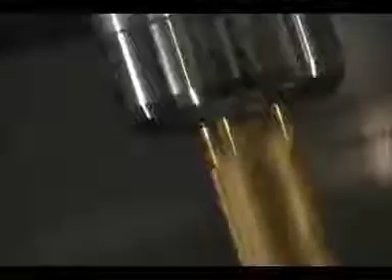NT Tool is pleased to introduce our newly developed milling chuck, the Super Tite-Lock CT-S series, available in BT, CAT, and HSK tapers.

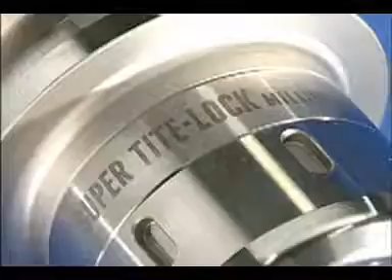The CT-S Super Tite-Lock milling chuck retains the physical dimensions of our popular CTA chuck, designed for light to medium cutting, but has the added advantage of being able to take the heavier cuts usually associated with our CTV chucks. The CTS is truly a general-purpose holder capable of going from finishing to heavy roughing cuts with one body, all while maintaining an economical size.

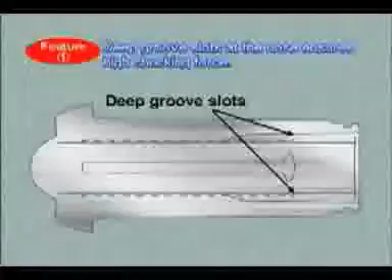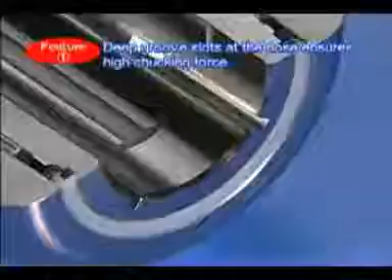Let me highlight a few of the technical features which will illustrate why NT's Super Tite-Lock CT-S milling chuck should be your first choice. First, NT has incorporated 4 deep groove slots spaced equally around the ID of the bore at the mouth of the tool, dramatically improving gripping forces in this critical area.

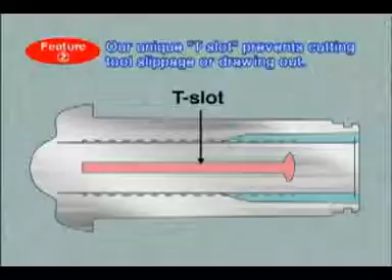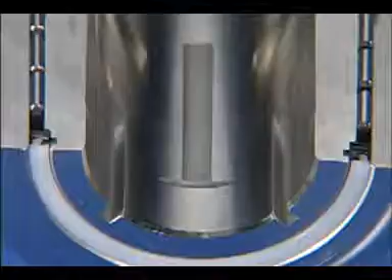Secondly, NT's patented T-slot grooves in this same area of the bore not only increase gripping forces, but also reduce micro vibrations, allowing heavier cuts to be taken. This combination of deep groove and T-slots ensures a tool which will be held securely with increased protection against tool slippage.

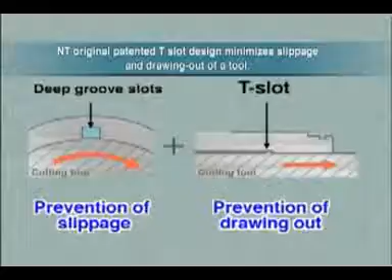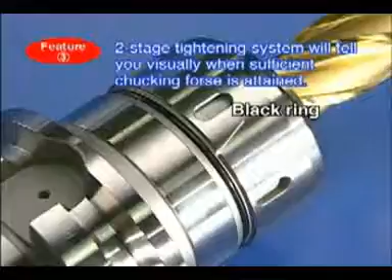Another unique feature of NT's Super Tite Lock CTS milling chucks is the 2-stage tightening system. Comprised of a black ring indicator and a tightening stop system, adjustment for cutting conditions ranging from finishing to roughing becomes easy and error-free.

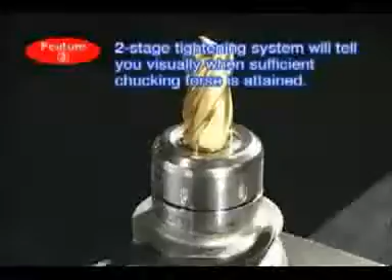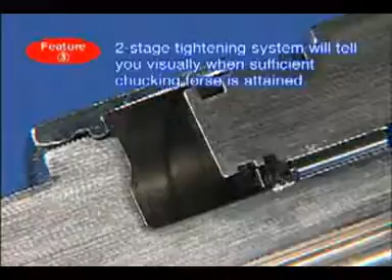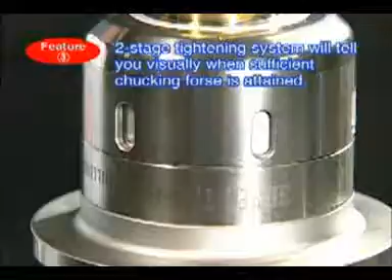When tightening, you are ready for high accuracy finishing and general machining when the black ring disappears from sight. Continue tightening until the tightening stop system engages, and you are now ready to perform those heavier cuts you need to make.

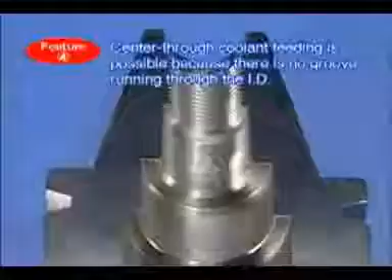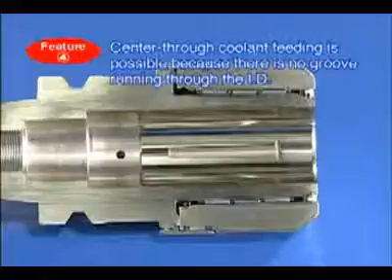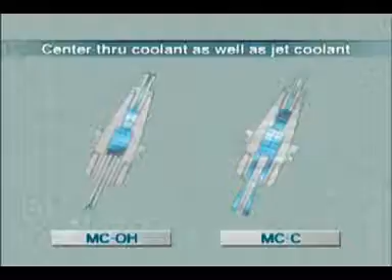Due to the unique design of the Super Tite Lock holder, through coolant is delivered directly and efficiently without the need for additional seals, as long as the tool shank is inserted past the deep groove slot. If using a cutting tool with a shank diameter smaller than the bore of the Super Tite Lock holder, NT's specially designed MC-OH coolant collets may be used. This will allow you to take advantage of the through-the-tool coolant capabilities, still with no additional seals.

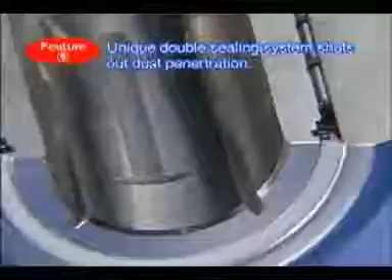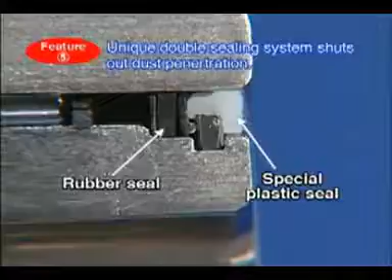The new double seal design of the Super Tite Lock holder allows you to run aggressive cutting data and also contributes to extended holder life. NT's double seal system, with a resin seal at the mouth of the tool and a rubber seal behind the locking nut, combines to create a sealed system. The internal components of the holder are protected from dust and other contaminants, reducing maintenance costs and extending holder life.

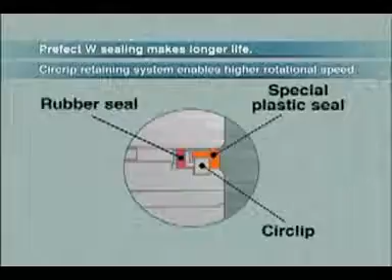Another advantage of the resin seal at the mouth of the Super Tite Lock milling chuck is security, allowing for machining at high RPMs without fear of seal releasing. In review, the new Super Tite Lock milling chuck from NT, incorporating new and unique design features, provides superior gripping forces and the ability to cover the full machining spectrum, from finishing to roughing, in one economically sized tool.

Now, let us look at some actual machining examples. Our first demonstration will be profiling in carbon steel JIS code S50C, AISI code 1049 with a 32 mm coated high-speed steel end mill with 4 flutes. Cutting conditions for this demo are 380 RPM with a feed rate of 152 mm per minute. The axial depth of cut is 60 mm, and the radial depth of cut is 3.5 millimeters.

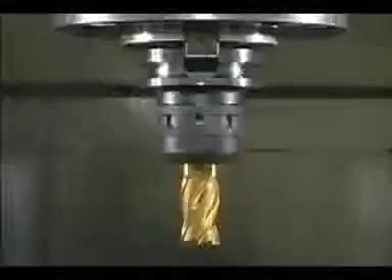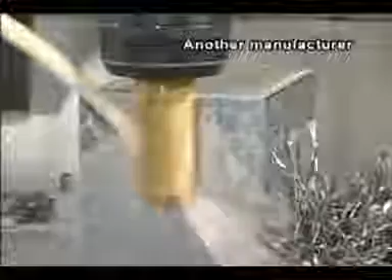First, we will perform the demonstration with a milling chuck from another manufacturer. The holder is a BT50 with a 32 millimeter bore and a gauge length of 105 millimeters. Upon inspection, it is evident that there was chatter during the cutting operation, resulting in an unacceptable surface condition. As a result of this chatter, in addition to poor surface finish, machining accuracy will suffer, and the cutting tool edge will fail prematurely.

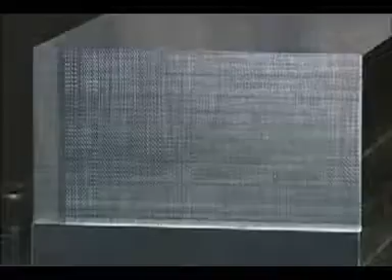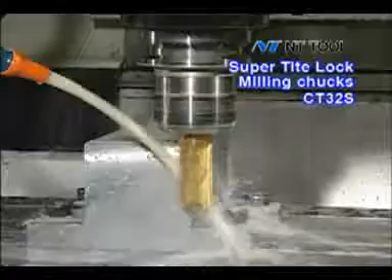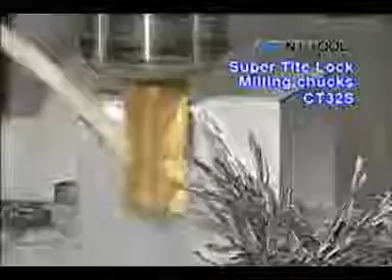Now, we will run the same demonstration with no change to the cutting data using a Super Tite Lock CT32S milling chuck. Again, the holder is a BT50 with a 32 millimeter bore and a gauge length of 105 millimeters. As you can see, the operation was successful. The problem of chatter has been eliminated thanks to the stability provided by the CTS Super Tite Lock milling chuck.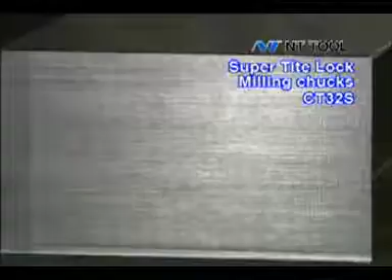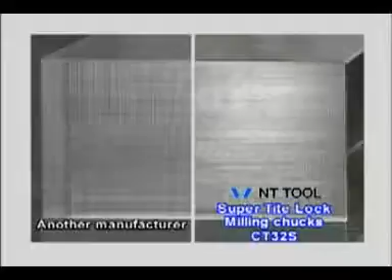Let's take another look at the two parts. As you can see, there is an obvious improvement when using the CT32S milling chuck. Now, we will run another demonstration, this time performing a roughing cut. The material is alloy tool steel JIS code SKD11, AISI code D2. The cutting tool is a 6-flute high-speed steel roughing end mill. We will be removing 127 cc's of material per minute using the following cutting conditions: 212 RPM with a feed rate of 106 millimeters per minute, and depths of cut at 40 millimeter axial and 30 millimeters radial.

Once again, we will first run the demonstration using a competitor's holder with a BT50 taper, a 32 millimeter bore, and a gauge length of 105 millimeters.

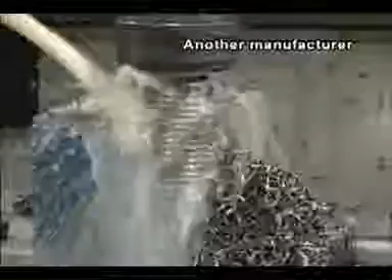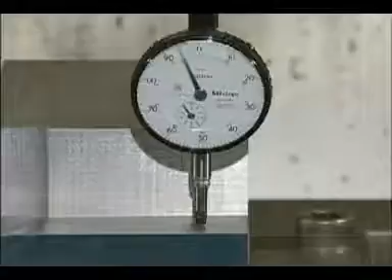When using aggressive cutting data, a common problem is slippage of the cutting tool in the holder body. Let's check for parallelism at the bottom surface. It can be seen that, even though over only a short distance, the cutting tool has already slipped 0.5 millimeters. We will run the same demonstration using NT's BT50 CT32S 105 Super Tite Lock milling chuck.

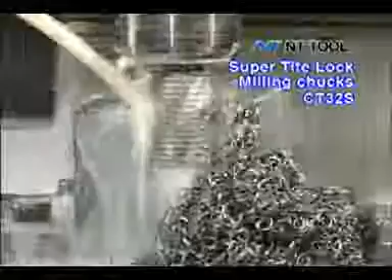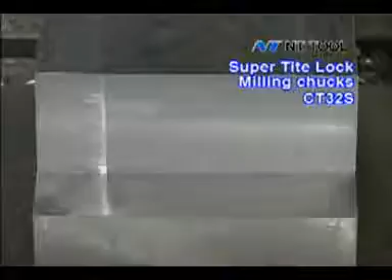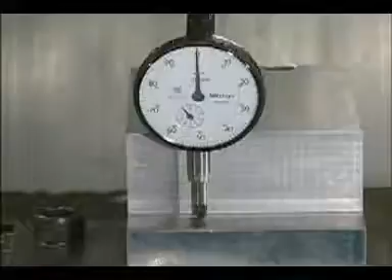An acceptable surface has been generated. Now, we will see if any tool slippage has occurred using the CT32S milling chuck. The cutting tool has not moved at all. Let's compare the two results. Competitor's milling chuck, tool slippage of 0.5 millimeters. NT's Super Tite Lock milling chuck, no tool slippage at all.

In closing, we have demonstrated for you that the Super Tight Lock milling chuck from NT Tool should be your first choice for operations ranging from light to heavy-duty cutting, providing you with the accuracy and rigidity you require in an economically sized package. Super Tight Lock from NT Tool.